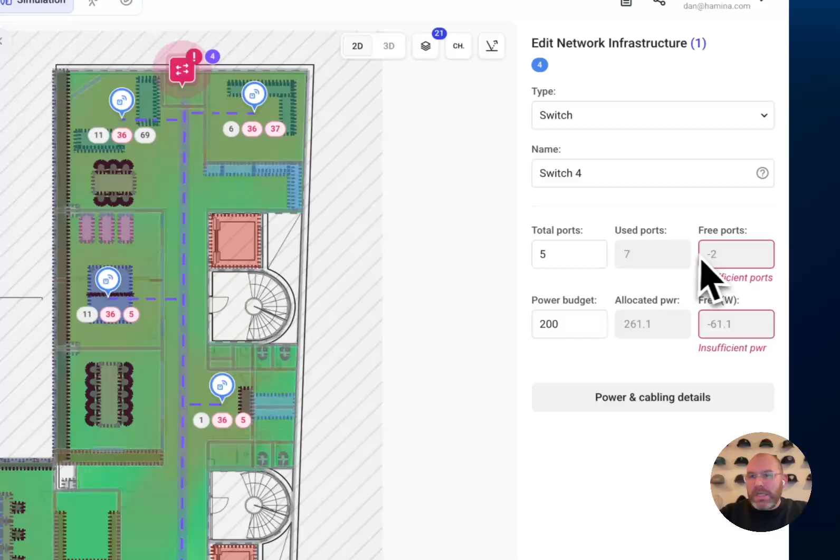So this is my office. I'm looking at what's going on, and the first thing that stands out to me is the switch is complaining about something. Okay, so let's click on the switch. Okay, we don't have enough ports. We don't even have enough PoE power budget. Okay, so we're going to have to upgrade the switch. So let's go to a 24 port switch with 500 watts of PoE budget. Okay, so now we can see the switch is happy. We can move on to the next thing.

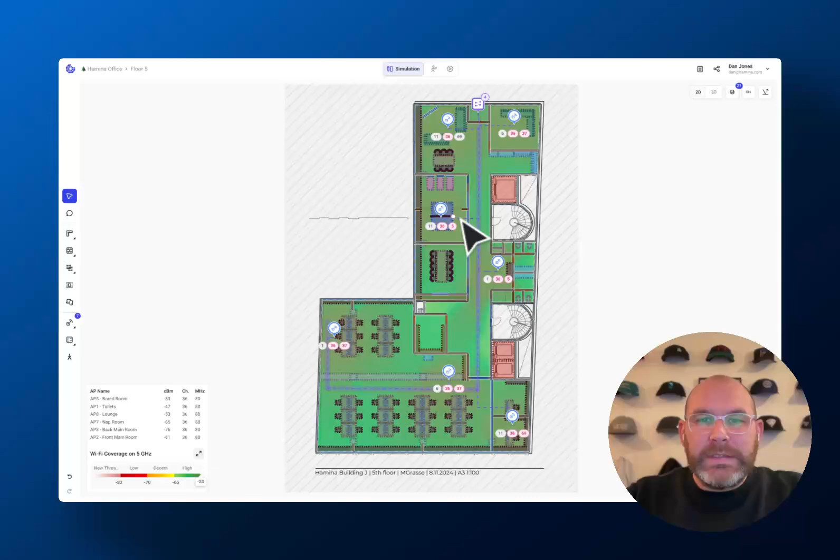Okay, so when I'm looking at it, the coverage looks good. I'm on 2.4. I can look at 5. I can look at 6. So everything's looking good there. Coverage wise, I've got coverage everywhere, but everyone's complaining that the experience is terrible. Okay, so let's have a look. If I go to my primary coverage, that looks good. Maybe it's a roaming issue. Maybe we don't have enough good secondary coverage. I mean, that looks good everywhere. There's no issues over here.

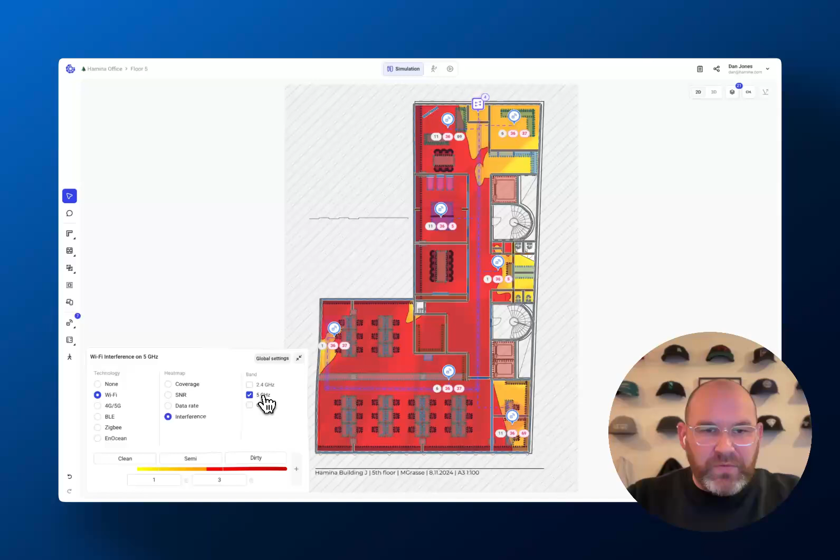Okay, let's have a look at our primary uplink and downlink. So downlink looks good. Uplink looks good. Okay, so that's all fine. Okay, let's have a look at interference. So we've got interference on 5 gigahertz, we've got interference on 6 gigahertz, and we've got interference on 2.4. That's probably what's causing the problem.

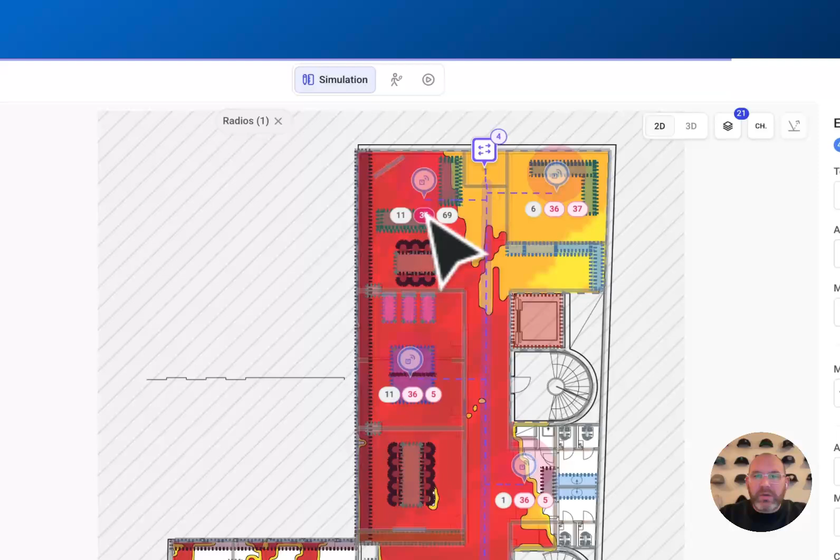Okay, so let's have a look at 5 gigahertz. If we have a look here, we've got our 2.4, our 5 gigahertz, and our 6 gigahertz channel. You can see here, we're on channel 11 on 2.4, we're on channel 36 on 5 gigahertz, and we're on channel 69 on 6 gigahertz. So we can see that, look, all of our APs are on channel 36.

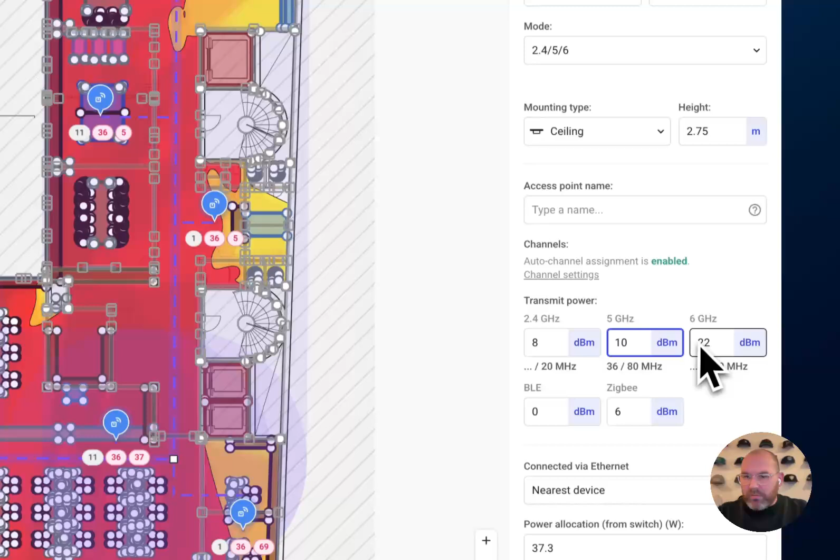So maybe what we need to do is bring the power down. Look, our power levels are quite high. Let's bring our power levels down. Let's go to, I don't know, 8. Let's go 8, 10, and 12. Right, has that fixed the problem? I mean, it's made it better. So we're not overlapping as much now, but there's still way too much going on.

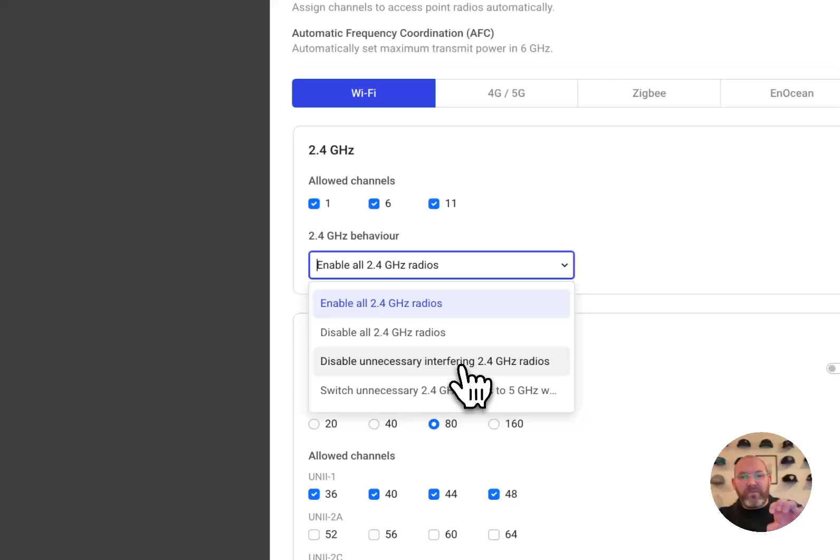Let's go and have a look at our channel plan. What's the issue here? Okay, so all of our 2.4 radios are enabled. Why don't we say, okay, go through, figure out which APs can I turn off the 2.4 radio? I still want good coverage, but which ones can I turn off and still have good enough coverage?

Okay, here's the problem. So we're at 80 megahertz wide channels. Okay, let's go down to 20 megahertz wide channels and see if that fixes it on 5 gigahertz. Okay, so that has made a massive difference, just by saying don't use 80 megahertz wide, use 20. So now we've got 4 available channels to us. We're still getting some interference though, and obviously now our speed is much, much lower.

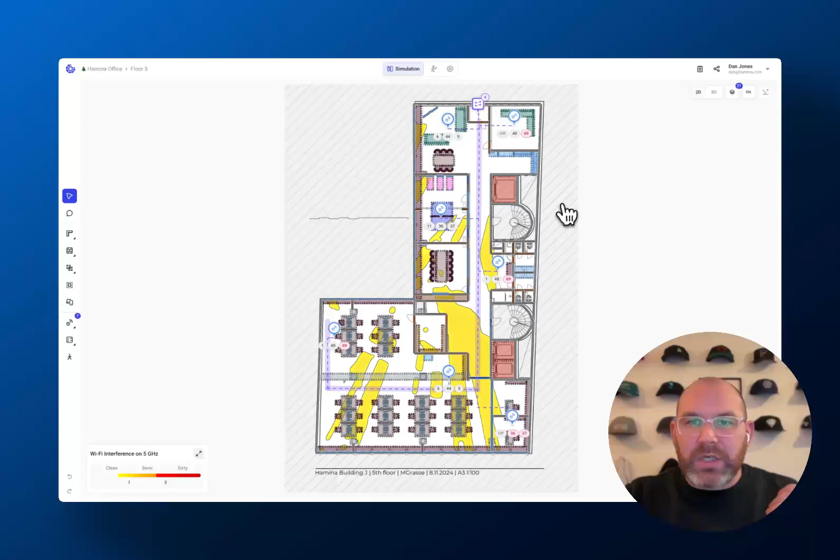So let's go back into here. What we'll say is, okay, you choose the channel width for me, and you can actually use all of these channels. Quite often when you just get a router at home or something like that, you might only get 4 channels available to you because these are the non-DFS channels. But this is an enterprise system. We can use all these channels, so let's use all these channels.

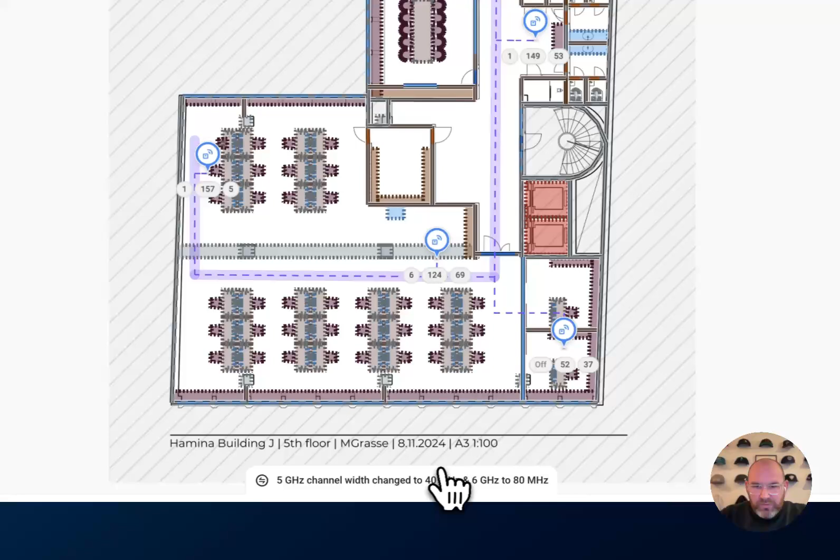Okay, and then let's do the same for 6 gigahertz as well. So we'll say you choose the channel width for us. So go as wide as you can until there's too much interference and then make it smaller. So let's click save. And you notice here, 5 gigahertz has changed to 40 megahertz, 6 gigahertz to 80 megahertz. So we're still getting as wide channels as we can. We're getting the best performance we can, but now we have no interference on this network whatsoever.

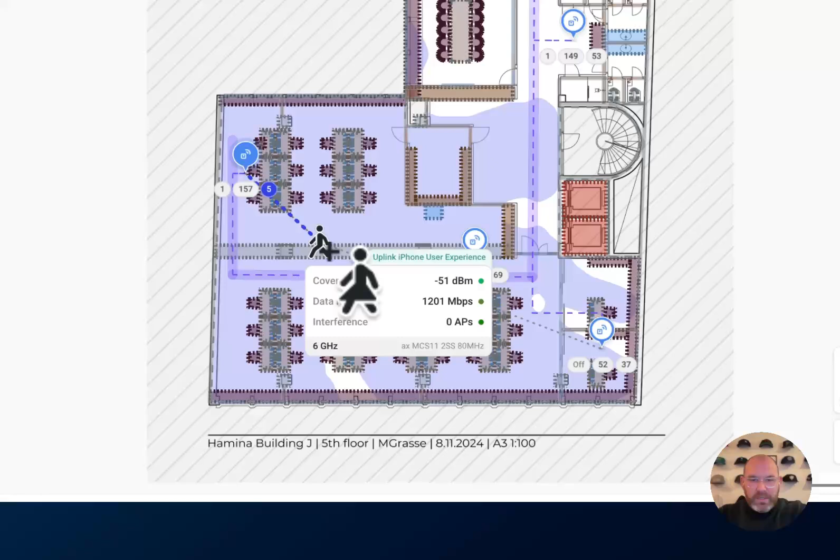So let's have a little wander through as our client. So we're an iPhone 11, and we can see, look, there's no interference. There's no other APs on that channel. I've got really, really fast data rate because I'm 6 gigahertz capable. So I'm able to use those 80 megahertz wide channels. As I walk through, I roam from AP to AP, but I'm not going to get stuck as I come and sit down here at my desk. Everything looks great.

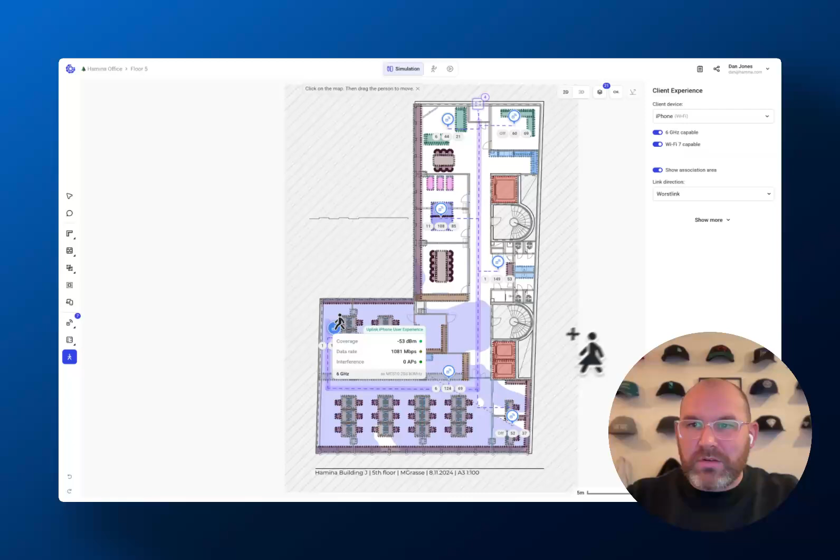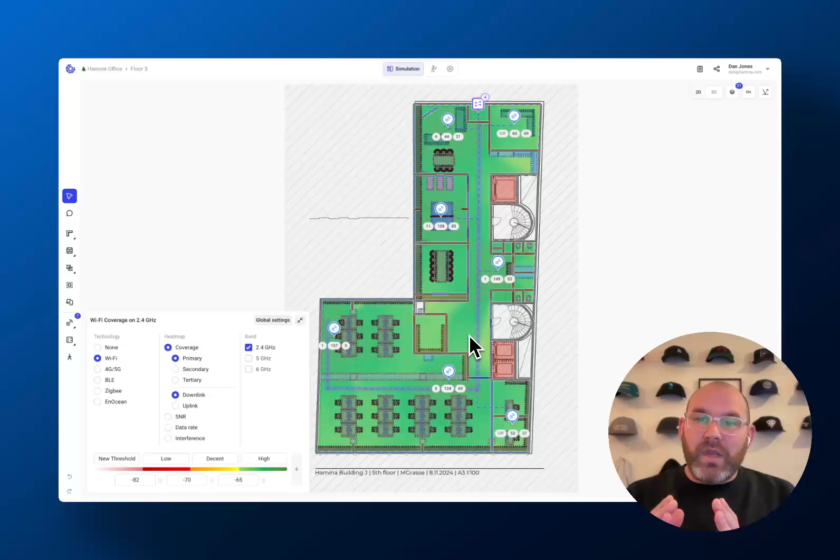So there we go. We've been able to fix the Wi-Fi just by going through. Let's double check because I want to make sure that our coverage is still good. So we've still got good coverage, even though we brought the power down. We've still got good coverage in 6 gigahertz, and we've even still got coverage even though we've turned off a bunch of these APs. So this AP has got its 2.4 radio turned off. This AP has got 2.4 radio turned off. We've still got good coverage. But now we don't have loads and loads of interference.

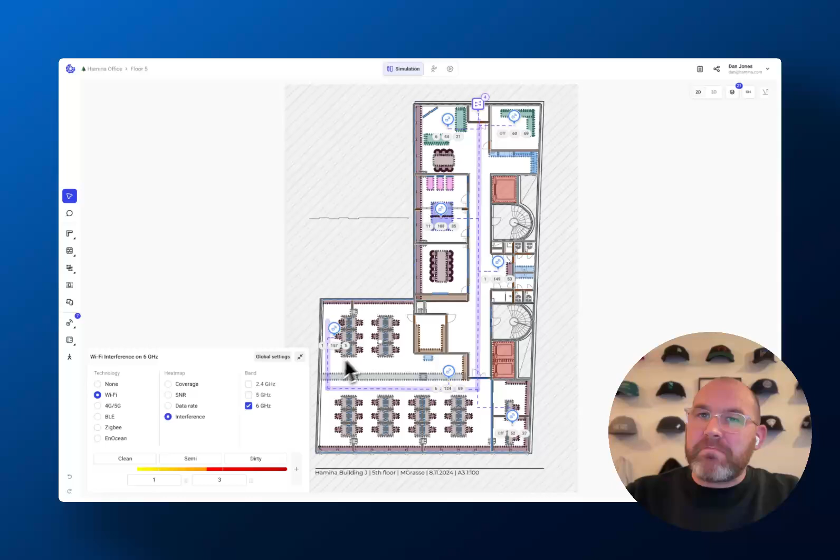If we go back to the interference, we've still got some on 2.4, but bearing in mind, we're not going to be using that for our client devices. That's more just going to be IoT devices. We've got no interference whatsoever on 5 and no interference whatsoever on 6. So yeah, there we go. We've just taken the really bad Wi-Fi that we had in the office and we've made it good.